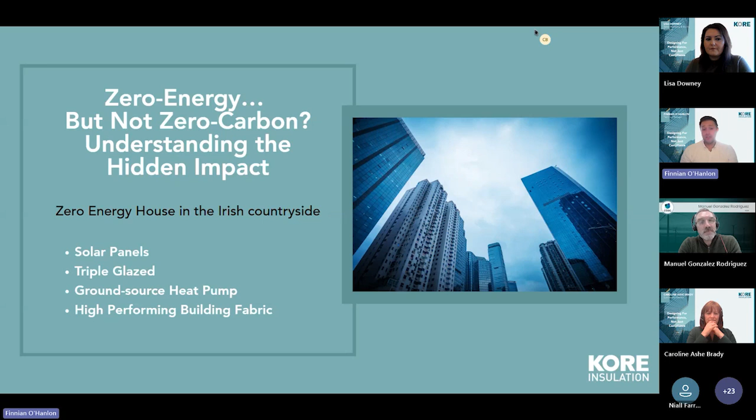So if you imagine you want to build a zero energy home, so you choose your high performing building fabric, you incorporate your solar panels, you've got your triple glazed windows, you've got your heat pump, and you're producing just as much energy as you're consuming. So you're proudly energy zero.

But if we start to delve into it, if we start to look at it just a little bit more, we realize that we demolished a perfectly good 1960s bungalow to build this. We put a basement in with 250 tons of reinforced concrete, and we've got steel cantilevers that are supporting those carefully orientated windows, and each of those was installed by a crane. Now, I'm being a little bit facetious with this, but you can see where my point is. So even though we're zero energy, our total life cycle carbon footprint is enormous, and it could take 100 years of zero energy operation just to offset the emissions from all that construction.

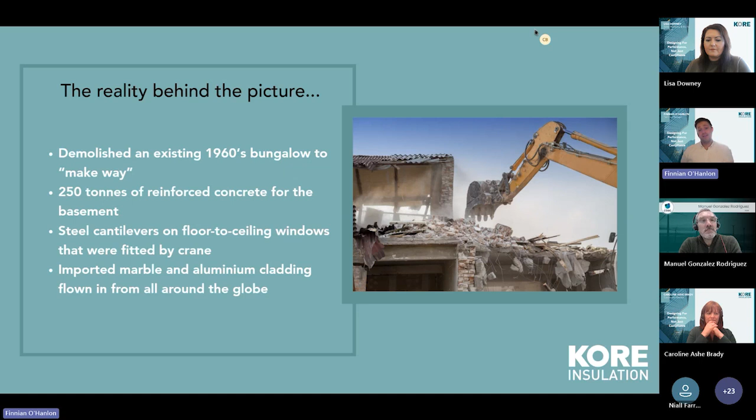So what exactly is embodied carbon? What are we talking about? Well, I think it's very important that we say it's not the element carbon that we'll see on the periodic table. What we're talking about is greenhouse gas emissions, and we express it as a CO2 equivalent. And that's just for ease of comparison. And what it refers to is the emissions that are generated before and during construction, any maintenance that's involved with that building over its lifetime, any replacements of parts of that building also factored in, and the end of life, so your demolition, your deconstruction.

Your EPD then is all that data that's verified by an independent party, and that allows us then to compare apples to apples when we're looking at materials. Now, it's not always as straightforward as that, but it's certainly much closer, and we'll look at that shortly. In life cycle terms, when you're looking at embodied carbon, your key modules that you want to look at are modules A1 to A3, which cover the cradle to gate stage, and that's the production of the product right through from raw material to leaving the factory.

Your operational carbon is the carbon that you're producing as a result of the use, and it's predominantly energy use. So things that influence that are your building fabric, your air tightness, your system efficiencies, and your occupant behavior as well. Unlike embodied carbon, operational carbon emissions can be reduced. So you can do things like upgrade your fabric, upgrade your heat systems, or you can even incorporate behavioral changes, lowering your thermostats, whatever it might be. So you have that option. Whole life carbon then is both of those things, along with whatever is required in the end of life.

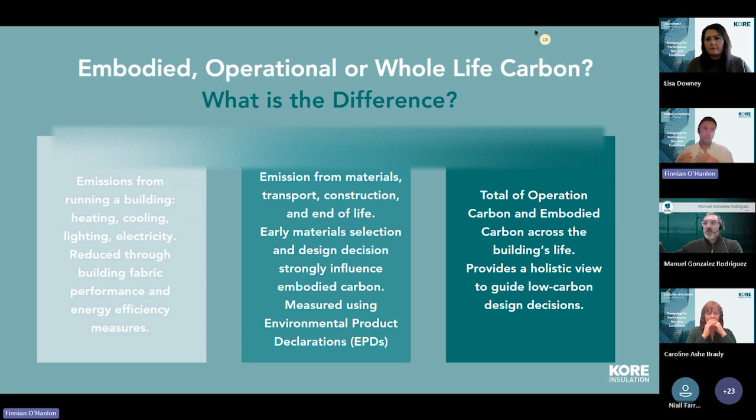So again, your demolition, deconstruction, but there's also an optional recovery phase or stage module D that allows for reuse or recycling of materials.

Now, over the past 2 decades, our operational energy use has dropped dramatically. And again, it all comes back to the better insulation, the air tightness, the renewable systems. And that's been really great news. It's a positive step forward. But what it also means is that materials and construction now account for the majority of a building's lifetime carbon. And the problem with this is that it's front loaded. It's released immediately during construction, and it can't be offset.

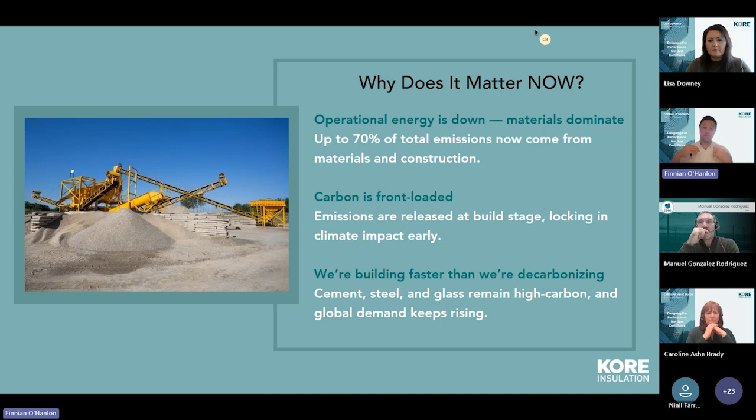So you also have this simultaneous thing happening where global construction is generally increasing. And I know it's a little bit stagnant at the minute, but that aside, it's generally increasing faster than, say, the carbon intensity of materials like steel or cement is reducing. So really every ton of those materials that we're using today locks in emissions that can't be undone.

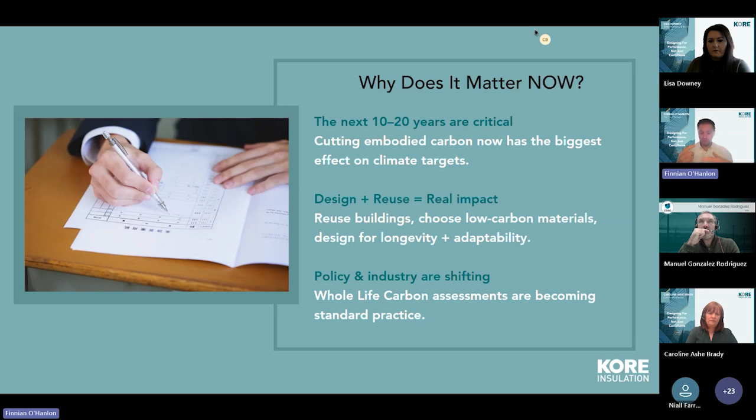And if we go into that further, the next 10 to 20 years are really critical. But the good news is that designers, engineers, specifiers all have really powerful levers available to them. And it's reusing existing building stock, reducing over specification in materials, and choosing low carbon materials. And really, acting now isn't just responsible standard practice, it's really essential.

And policymakers, right at a European level, know this. And because of that, we've ended up with this Energy Performance of Buildings Directive. So you could be familiar with that, the EPBD. And this is the EU's core legislation that drives improved energy efficiency and decarbonisation in buildings.

Now, the SEAI have developed this lifecycle global warming potential calculation methodology, which is a really good step forward. But the slight drawback with it is that it relies on generic emissions data, which is also expressed in CO2 per kilogram. And that's fundamentally different from what you would expect to see in an environmental product declaration, an EPD, which typically expresses impacts per functional unit of meter cubed. Now, all this will make more sense as we go on, but the mismatch means that the values are somewhat open to interpretation, where low density materials seem more favorable and high density materials might seem disproportionately carbon intensive.

So if we look, for example, at the generic values included for PIR, it looks like an attractive figure of 3.7 kg CO2 equivalent per kilogram, whereas EPS is 4.78. However, if we factor in the density of those materials, we'll realize that PIR is actually 130 kilograms of CO2 equivalent per meter cubed, whereas EPS is slightly over 73.

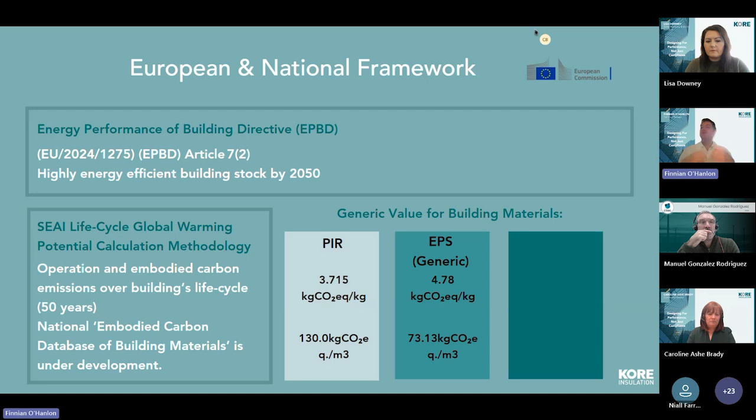Now, in terms of the frameworks industry is using that aren't necessarily legislatively driven, the two most prevalent ones really are the RIAI Climate Action Plan and the RIBA 2030 Climate Challenge. Now, the RIAI is less benchmarked, quite aspirational, and it looks at reducing operational energy demand, cutting embodied carbon by at least 40%, reducing potable water by at least 40%, and achieving core health and well-being targets, which are all great.

And slightly differently, RIBA look to set performance benchmarks. So with this, you've actually got a figure that you need to achieve. So on embodied carbon, for instance, it's assessed at 625 kilograms of CO2 per meter squared of usable floor area. RIBA actually also aligned themselves with the RICS methodology, the WLCA methodology, which is currently in V2.

RICS is the Royal Institution of Chartered Surveyors, and it's a professional standard for evaluating the life cycle carbon of buildings and structures. And it looks at all the modules of an LCA. So you're looking at materials, construction, operation, maintenance, end of life, and potentially recovery there as well. It gives you a consistent framework where you can quantify, and it ultimately helps designers make informed decisions.

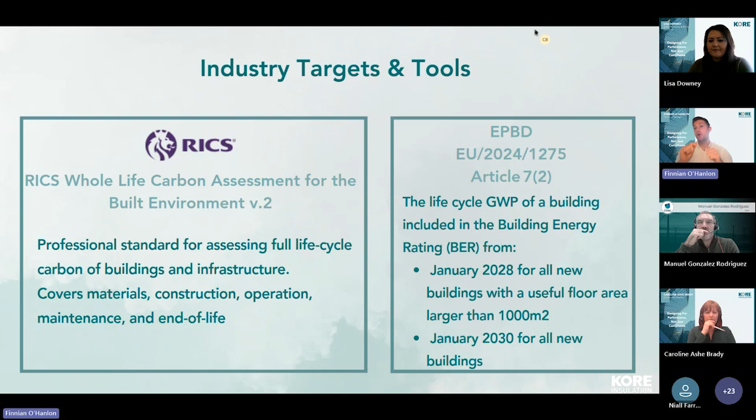And then circling back, complementing all this, the EPBD actually requires us to report on this figure. So from the 1st of January 2028, all buildings over 1,000 square meters of usable floor area will have to report this figure in their BER. And equally from the 1st of January 2030, all buildings will be required to report this figure in their BER.

So with all that in mind, and given the length of planning timelines here and design timelines, it's actually not unreasonable to say that whatever projects are currently in design phase will almost certainly be subject to these requirements by the time a commencement notice is submitted, which is 1st of January 2028. So you're looking at about 2 years there, which depending on the scale of the scheme, as I say, isn't unreasonable. And for that reason, your material choice and your specification right now strongly influences the building's carbon footprint later on. Insulation in particular affects both your operational and your embodied carbon.

And really that's where EPS comes to the fore. It's lightweight, you've got a high thermally performing product, and it's also a low carbon material. Moreover, it's actually also recyclable at the end of life. So you've got a whole life carbon reduction.

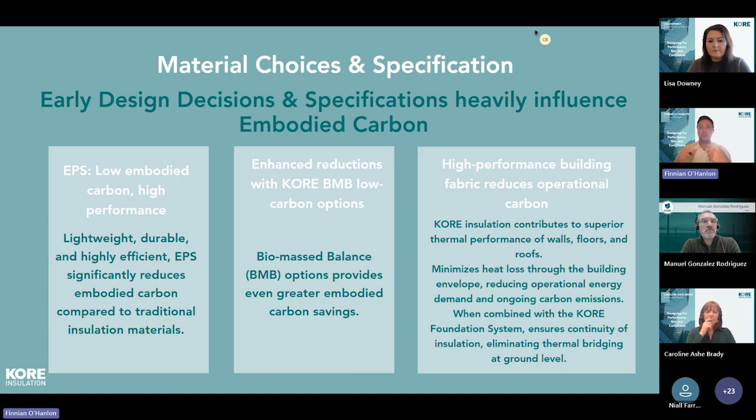If we look specifically then at KORE EPS, as Caroline said, we started this journey a long time ago, and we've been working hard to produce the lowest embodied carbon EPS in the country. We've got verified EPDs showing how low the embodied carbon content is, and again, all due to that work we've done. In addition to that, we've got biomass balance options that help you further reduce your carbon. And it's also locally produced in Ireland, meaning you're minimizing transport emissions.

So ultimately, the early specification of KORE EPS locks in carbon savings before the construction has even started. And it actually also avoids situations where you're trying to update and change specifications closer to the site kicking off.

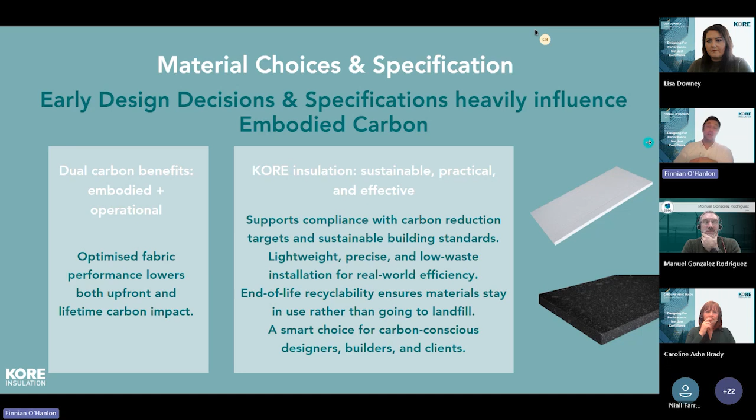So now if we look specifically at EPDs, it's important that we give it some context before we launch into it. So what is an EPD? Well, an EPD, as I said earlier, is an independently verified document that reports on the environmental impact of a material throughout its entire life cycle. And it's developed based on standardized reporting rules. So again, it's to give you that like-for-like comparison, especially when you're looking at embodied carbon.

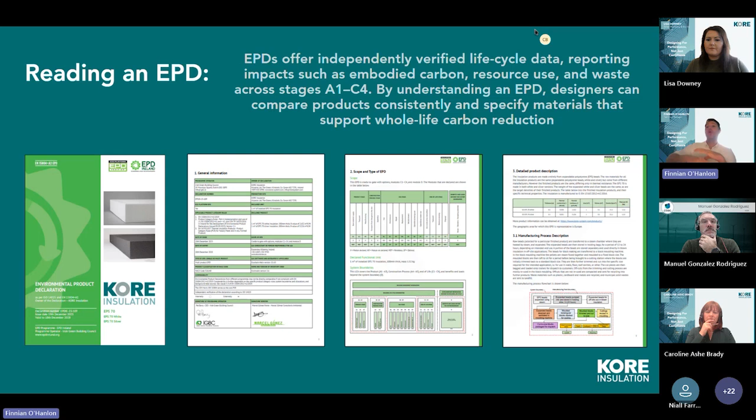Your first few pages, which we've shown here, really give you details on the product, details on the manufacturer, how it's intended to be used, but crucially, it also gives you your functional units. So you'll see on the third page illustrated, you've got 1 meter squared of installed EPS 70 insulation, 100 millimeters thick. And that's very important because that is the functional unit to which all of the figures in the EPD relate.

So as we go through it, we'll come across our LCA, or life cycle analysis, and this is the real meat. This is the real data. This particular one is for KORE EPS 70 Silver, which is probably one of our most common products for floors, particularly those with underfloor heating. And your LCA results are probably the most relevant pieces of information, particularly the modules A1 to A3. So again, that's cradle to gate. A4, A5 relate to transport and construction. So that's why we're looking at A1 to A3.

What we want to look at specifically is that figure that we've circled in red, the GWP total of 4.7. And that's made up of the three figures below it, which are GWP fossil, biogenic, and land use, that's land use and land use change. So we can see that combined, those three values bring us up to 4.7 kilograms of CO2 per functional unit, which again, if we look at the top, is 100 mil of EPS 70 board, a 1 meter squared section of that.

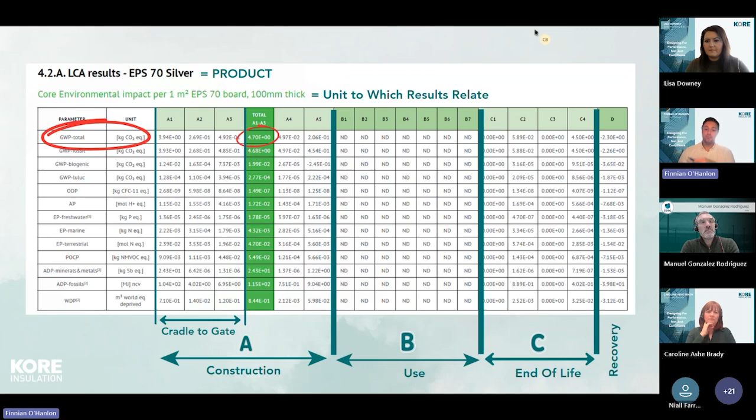And I've breezed over it, but if we look at the EPD as a whole, we can see it's broken down into 4 different stages: modules A, construction, modules B, use, module C, end of life, and the final one there, recovery, which is a negative figure because you're looking at recycling it or reusing it.

Now, if we drill down a little bit further into that data, we can see that there are a number of little nuances that are very useful to know. As I said, you've got your fossil, your biogenic, and your land use, and that's ultimately what makes up your GWP total. But it's also worth pointing out that the figures are all in scientific notation, and this sometimes makes looking at an LCA very difficult. The reason it's done like that is just to keep consistency of units, but it's actually very easy. So if we take our land use figure, the very bottom row, we can see that we have 2.77 times 10 to the power of -4.

And quite simply, that means we divide the 2.77 by 10,000. And the reason we divide it and not multiply it is because it's -4. And that results in 0.000277. If you want to get into the bones of that and you want to understand each one of those numbers, quickest way to do it is to copy and paste the figure into like an Excel sheet and just precede it with equals, and it will give you the number, which sometimes helps.

Knowing all that now, and knowing that our GWP total is 4.7 kilograms CO2 equivalent per functional unit, which we also know is 0.1 meters cubed, we can determine that times 10 is 47 kilograms of CO2 per meter cubed. So now we have a usable value that we can apply across whatever it is we're doing.

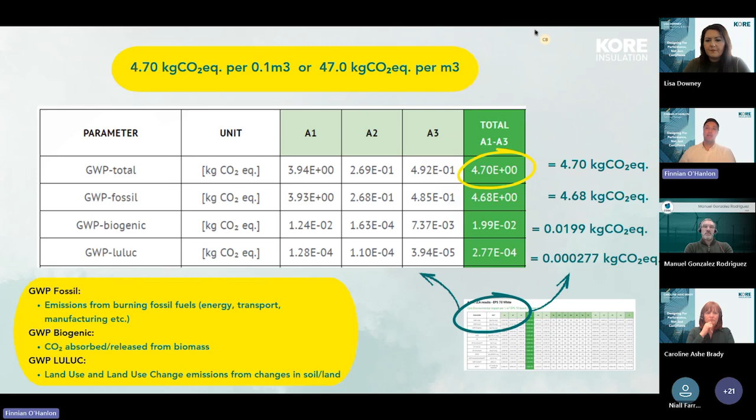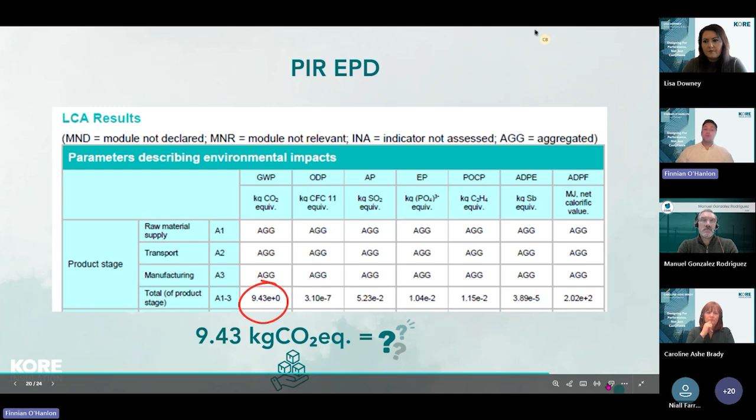So if we drill into that a little bit more, we'll see that we have to flick back to the earlier pages of our EPD. And we can see that 1 meter squared down the bottom right of insulation at a thickness that gives an R value of 3 square meters Kelvin per watt. Now, they've been kind enough to tell us that that's 66 millimeters in this particular EPD, but that's not always the case. So if that measurement was omitted, we would then have to determine what our thermal conductivity is and figure that out ourselves. Now, fortunately, we have it.

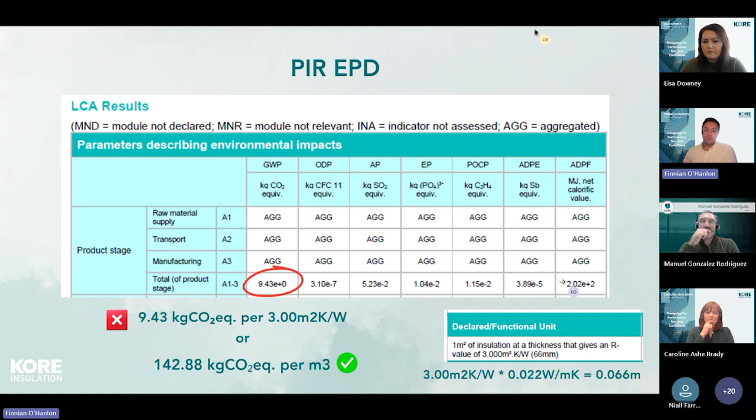So applying the same rules, we can work out that 9.43 kilograms of CO2 equivalent for 3 square meters Kelvin per watt is equal to almost 143 kilograms of CO2 per meter cubed for that particular insulation. So now we've got comparative values. We can actually look at this and how would we apply this to an actual project. So let's take an easy example.

If we looked at a 3-bedroom semi-D, we're looking to achieve 0.15 in our U value, which is what we want for underfloor heating. And we've got a perimeter to area ratio of 0.4. So all pretty standard stuff in terms of a housing scheme in Ireland. To achieve that with PIR, we'd need 120 millimeters, which gives us a total result of about 984 kilograms of CO2. However, if we use KORE EPS 70 Silver, we'll need 160 mil of it, so slightly more. However, our carbon is less than half.

And what you'd also find with that is you're usually trying to make up your 225 increments of your block. So you would end up with a screed of, say, 65 millimeters to do that. So again, a kind of an onsite saving in that as well, because you're using less screed.

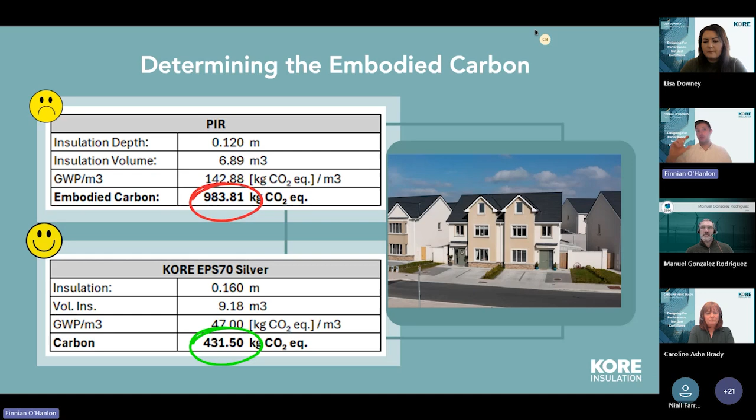I did say I would come back to this slide, and this is the SEAI methodology. And if we reverse that same logic that we applied in the first place, and we take the KORE EPS70 Silver, we can see that that 47, if we apply the density, works out at 3.13 kilograms of CO2 equivalent per kilogram. So you can see that that's significantly less than the generic EPS value, and it's also less than the generic PIR value that's included there as well.

So while the calculation tool gives us a really good starting point, it's not necessarily straightforward, and it's always good to do your own research and get the verified EPDs from the manufacturers to determine it yourself. I hope that was a useful introduction to embodied carbon and to EPDs.

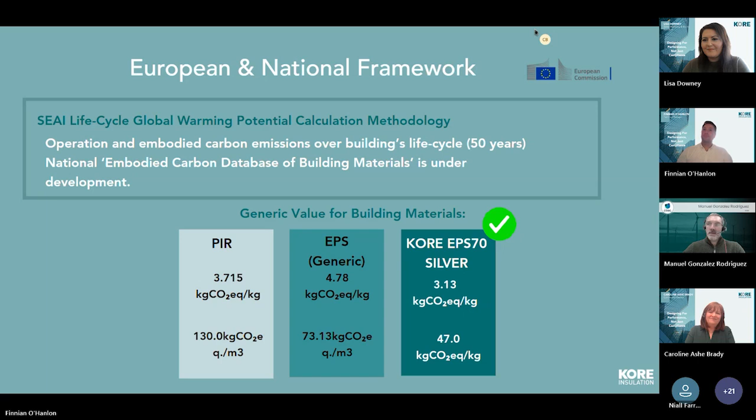And at this point, I'll hand it over to Manuel. Thank you very much. Just sound check. Can you hear me well? Yep. Yep. Perfect. Thank you very much. Should I just pop mine, or are you going to share this? You can share the screen, Manuel. Okay, perfect. Second then.

Oh, sorry. Wrong button. Are you looking at my screen? I'm just going to put it in full screen now, so I won't see you anymore then. Yeah, is it full? Yep.

Yes, perfect. All right. Well, as you can see by my name, my very Irish accent, I'm not originally from Ireland. I'm originally from Costa Rica. I've been living here over a year. I came to Ireland last September, and it's been a wonderful journey. I'm going to survive my second winter pretty soon now.

Originally, I worked on managing carbon footprint for over 22 years. I used to lead a verification validation body, which would do the verification of embodied carbon, operational carbon, for all sorts of organizations based on international standards. So my presentation will be more overarching and general about what is the framework around all the carbon footprinting, and what are the drivers, and why we're obsessed with this.

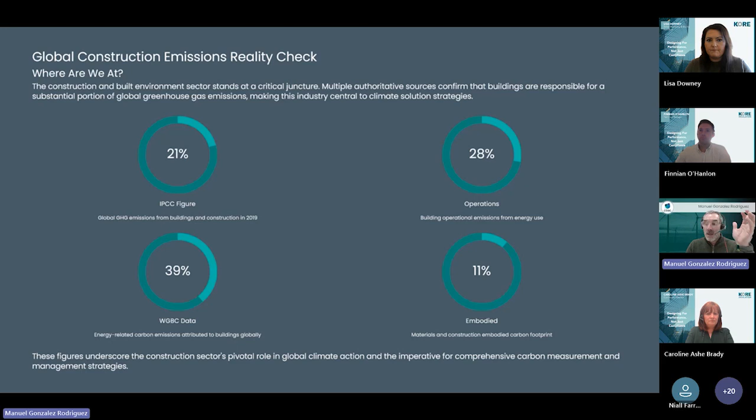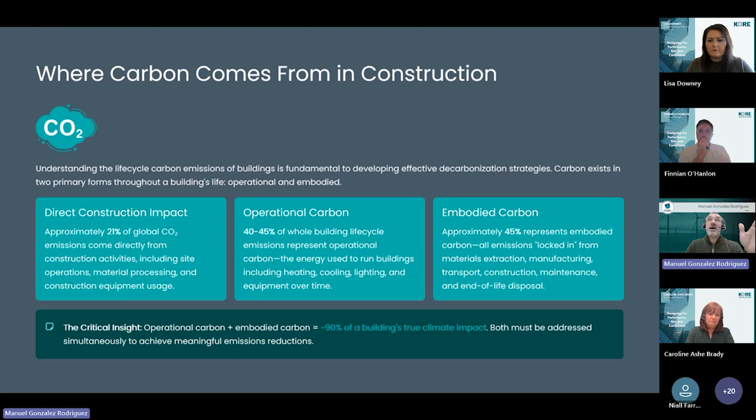How does this look? These are figures that we've taken from, and I've seen a lot of publications on this, and that's why, as Caroline was saying before, it's very important to fact check, or to be verified by a third party for assurance. Figures are saying that most will come from operational and then less from embodied carbon. About 28% to 11% is the figure that we've been getting in some of the publications. So this is pretty much the summary. Other figures will tell us it will be around 40 to 45% on operational and 45% on embodied. So we basically need to fact check all of this to understand where the industry is sitting right now and what the next steps are.

There's also a huge framework, and when I got here, I had to read a lot and study a lot just to understand all the framework that is leading or triggering all this. There's all this legislation related to the European Green Deal, the European Climate Law, the ESRS, the European Sustainability Reporting Standards, the EU Taxonomy, and all this legislation that is coming into place that recently, if you have been following this, has been a little bit diluted, or stop the clock and postponed, due to some political and economic pressures on the European Union. And probably companies sooner or later will have to face the facts and will have to start performing better and taking actions on tackling global warming.

As you saw before, by 2028, the Energy Performance Building Directive will hit the industry and will have to report as well on energy performance of buildings. So it's no longer an excuse to say, well, we can wait. I think it's better to start taking early actions on all this. And that is from a legislation, legal requirements point of view.

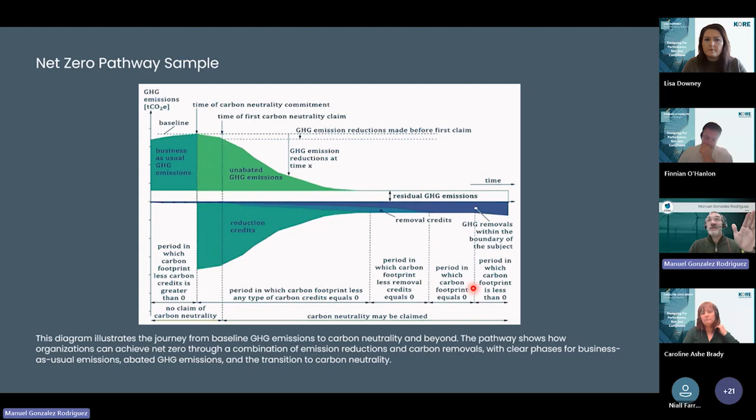This is just a very high level, quick explanation of the definition of a net zero pathway, and these are the requirements of an international standard. And there are a lot of different ongoing initiatives related to this, which pretty much, I would say, all merge with the same idea of tackling global warming and being able to set up proper projects in order to reduce your carbon footprint.

And you have to be very careful when you choose. It's very important to understand who is going to be your intended user, and also that the level of effort and investment that you're going to make will have a payback. Because of course, we have to do it for the environment and future generations, but as well, this has to be a competitive advantage for businesses in order to reach objectives and targets. It would be for those end users or consumers that will make decisions based on better environmental performance, and you will be rewarded with business if you're able to demonstrate that you've gone through this journey.

What are the barriers that we've been looking at working with business? Well, basically, we have different or fragmented tools and platforms, and especially, I would say, we have weak data infrastructure. Companies are lacking information systems that will report properly on energy performance. We're very good at reporting in euros. If you go to a ledger, you have your balance sheets and you know how much you spent, how much you earned, but that's usually in euros.

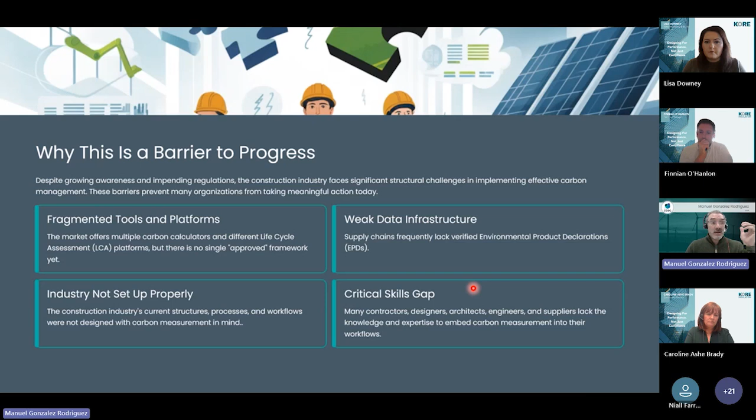When we start asking about the mass of a construction, the data of all the steel, the cement that went into it, we hit a barrier there in most cases where organizations may not have that. And we end up doing proxies with usually spend-based emission factors instead of using a mass balance, which would be a more accurate approach. And this is probably because there are some gaps in critical skills, and organizations may not have the proper roles and responsibilities for people to do this, or the knowledge and understanding of this.

We see this, as I was saying, as a competitive differentiation. And in some cases, not even that, I would say that it is the continuity of the business. Last year, we had a client that asked us to do their carbon footprint because they were part of the supply chain of a big pharma company. And they told them, if you don't have your carbon footprint by the end of the year, you will no longer be an approved supplier. So that is the kind of pressure some organizations are facing.

In the end, this will lead to a cost reduction through efficiency. It will give organizations a better reputation and brand value. And if you start early, the early bird will get better prices, and therefore you'll be seen first in the industry.

What are the main steps? I oversimplified this, but the first thing you need to understand and do is measure your carbon footprint, develop your pathway, and then implement and get a third-party verification for assurance. Those are very simple steps. Sounds very simple, but it's quite a journey. You can ask Caroline about her experience with this journey so far.

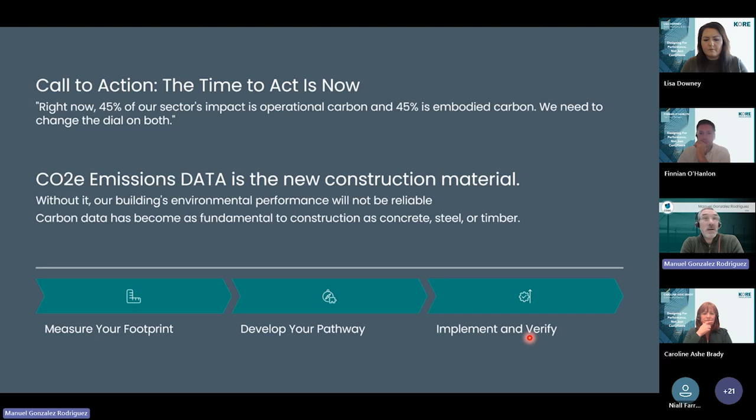And just to finalize, CO2 emissions data will be part of the new construction material now, because it's something that everybody will be looking at from now on in order to tackle global warming. I think that was pretty much my last one.